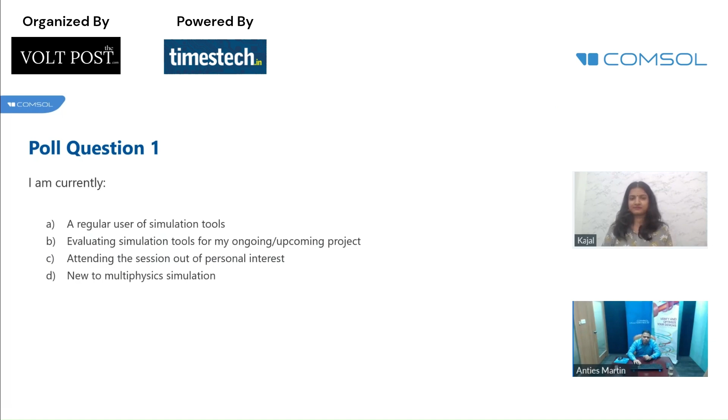So now I'll move to the core part of today's session, starting with the word: what is multiphysics? We'll repeat this word in the coming slides too, and I believe for many people it's already familiar, but I'd like to clarify what we mean by it.

As the name suggests, in COMSOL Multiphysics we focus on two different things: one is flexibility, another is accuracy. Flexibility means we are solving the numerical equations when it comes to the interfaces.

But since we are evolving day by day, you may need to modify the existing equation. So COMSOL is not a black box; you will be able to modify the existing conventional equations, and you can even write your own equation.

Now, coming to the word accuracy, we believe that if you really want to capture any real life problem, it is always going to be multi-physics in nature. So let me take a simple example. Just imagine you are working with a semiconductor device, or maybe I am going to work with an EM device. So my objective here is to understand the EM characteristics. Obviously, it's a single physics problem, which deals only with the EM.

But we know that majority of the time, due to Joule heating, or in a simple way, electromagnetic heating, there will be some heat generation. And it's really important to understand how much heat is getting generated. So in COMSOL, you can add the heat transfer interfaces to the same model, and you will be able to understand the EM characteristics and the heat generated.

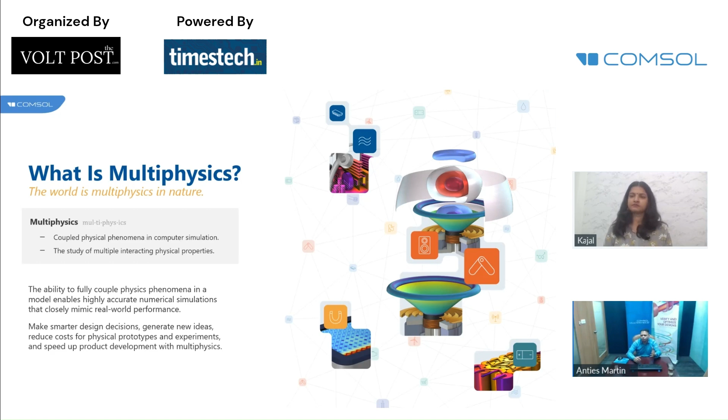Now you will be wondering whether COMSOL is actually the best one for single physics. Obviously, in COMSOL, you can even handle single physics. It could be EM physics or chemical physics, mechanical like CFD and heat transfer, or even structural and acoustics. On top of that, you can couple the same with any physics like electromagnetic heating, thermal stress, or even thermal expansion. You can go for electrochemical heating, and you will be able to address all of your problems by using a single GUI. I will explain what we mean by single GUI in the coming slide.

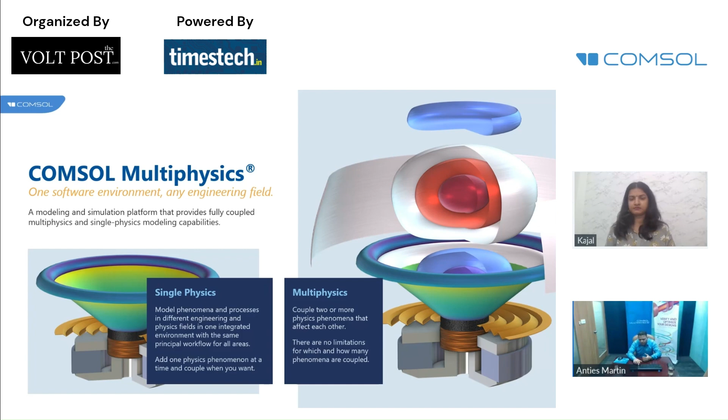Till now, we have just introduced the COMSOL software. Now, many of you will be wondering whether people are using it, or if there are any user stories or success stories. Definitely yes. So I have collected a couple of user stories just to give an idea how people have been using COMSOL software across the industry and in academic research and development. The first user story is related to electromagnetic heating.

We know that power electronics appears in many everyday products, including smartphones, electronic car parts, and household objects. And it's really important to understand how these devices are performing, whether heat is getting generated or it's going to affect the system. On top of that, in harsh environments, with temperatures of maybe about 225 degrees or less than 0 degrees, it's really important to understand whether these electronic devices are performing at the same level.

Because of this challenge, the company wanted to create an electronic package to survive in this kind of harsh environment. So they approached COMSOL, and with the help of COMSOL, they were able to couple low frequency physics and heat transfer, using LiveLink for SolidWorks. With that, they were able to optimize the device geometry and layer thickness, and minimize the inductance and the thermal resistance.

The major challenge they were facing was to couple these physics simultaneously. At the end of the day, if you are not able to solve all these equations in different physics simultaneously, you may not be able to replicate the real life problem as it is. But with COMSOL, using low frequency electromagnetics and heat transfer along with LiveLink for SolidWorks, they were able to optimize and create a package that survives harsh conditions and extreme temperatures of about 225 to 250 degrees Celsius.

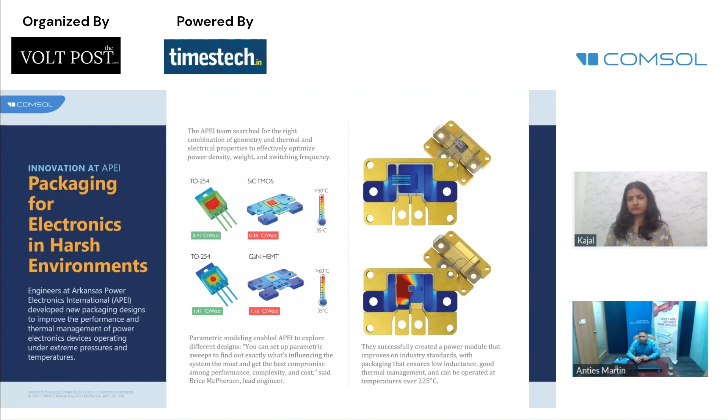Now, if you look at the second success story, which is actually from Bosch, I believe that the word itself is self-explanatory. We believe that Bosch is one of the well-known industries in the market right now, especially from the automotive point of view. So their major challenge was to create the DC link capacitors. The major problem they were facing was because of the hotspot, and these are very sensitive, and it is creating too much heat.

So the major challenge they were facing is, again, the low frequency physics coupled with heat transfer, and they have coupled the LiveLink for MATLAB as well. So they approached COMSOL. With the help of COMSOL, they were able to couple all these physics together, and they were able to optimize the design, and the optimized inverters have a 6% greater range and even a 200% jump in the power density.

So these are some of the user stories which are available in COMSOL and on the website as well. If I try to explain in detail, definitely it will take more time, so I'm not going to spend time over there. But if you are really interested, we can share this information with you so that you can explore more. Till now, we have discussed the user stories as well.

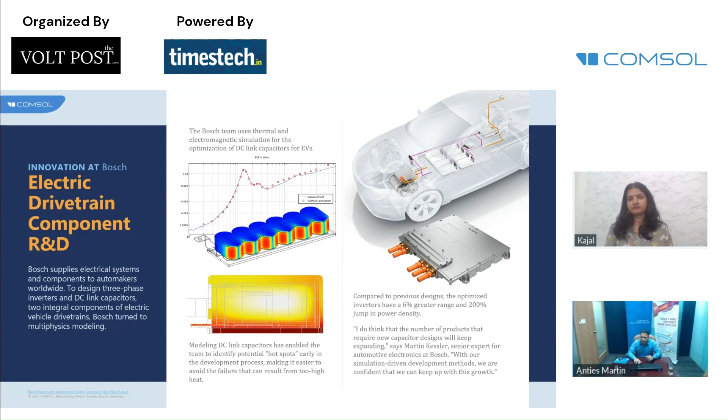Now, many of you will be thinking, why COMSOL? What about the other software? Now, let us try to understand what COMSOL can do when it comes to thermal management. So if you look at thermal management, the heat could be due to various reasons. It could be due to electromagnetic heating. It could be due to electrochemical heating. It could be due to radiation or some other sources. So it's really important to understand how heat is getting generated and how much fluid is required to carry away the heat from the system.

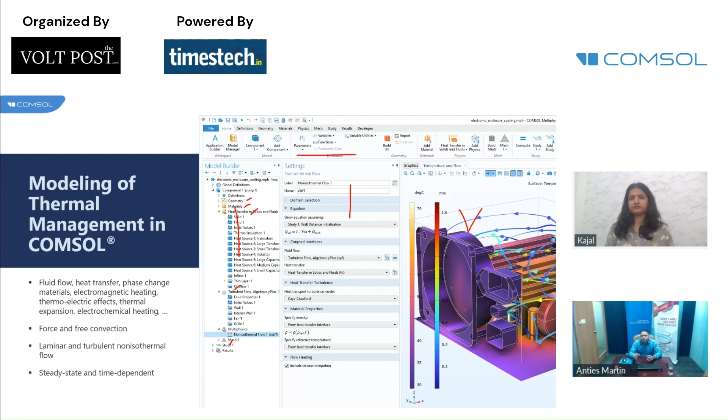So in COMSOL, by using a single GUI, you will be able to couple all these physics. When it comes to heat transfer, you can go for conjugate heat transfer, you can go for free and forced convection, and on top of that, all the turbulence models are available in COMSOL. Also, you can go for stationary and even transient studies. And while using COMSOL, these are the benefits you are going to get. As the name suggests, it's a multiphysics tool, which will help you to couple all these major physics. On top of that, it will give you complete flexibility to modify the equations and the boundary conditions.

And we are using a finite element approach. Obviously, the accuracy will be on the higher side, and you will be able to do certain parametric optimization to cut down your simulation time, and you will be able to optimize your devices. So these are some of the advantages of going with COMSOL software. And on top of that, you can do n number of things. You can capture the real-life scenario as it is.

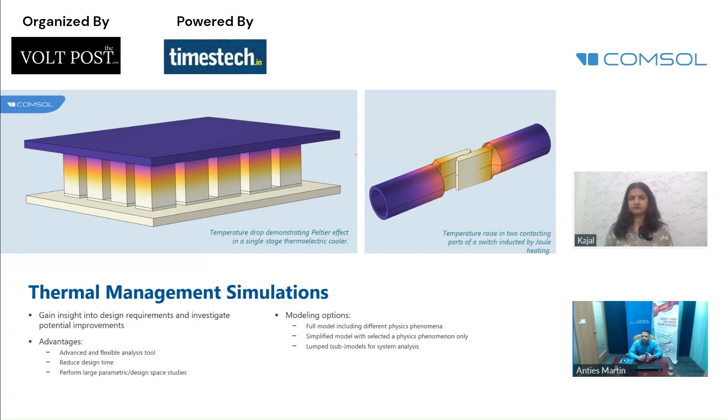So when it comes to thermal management, where is the heat source actually coming from, and how can you do that in COMSOL? You can do that in 3 different ways. The first way is user defined. Suppose you know how much heat is getting generated because of electromagnetic heating or electrochemical heating; then you can use certain empirical formulas, and you can use the same thing by a user defined approach. So you can give that explicitly by using the heat source option.

Now, the second approach is from other physics. Other physics in the sense that, suppose you are solving for EM physics and you are able to know the heat generation, you can use the same thing in the heat transfer physics. Obviously, this won't be a bidirectional one.

But in real life, what is happening? When you operate any electronic device or maybe a battery, the battery will be working and the heat will be generated simultaneously. You cannot run the battery for some period of time and then use the heat source to repeat that in the heat transfer physics. Obviously, you can do that by compromising the accuracy. But in COMSOL, you can do the multiphysics coupling for all the electromagnetic and even the electrochemical heating, which will help you to understand how the heat is getting generated and how the corresponding heat is going to affect the performance of the system, a kind of circular dependency.

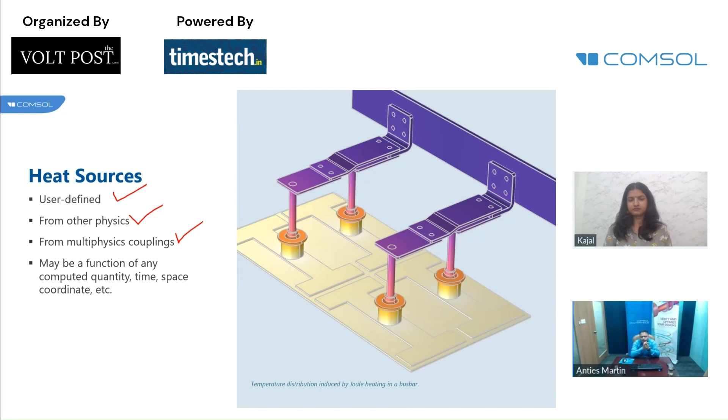Let us try to understand which are the inbuilt predefined multiphysics couplings which will help you to understand the heat generation and corresponding performance. I will start with microwave heating. The word itself is self-explanatory, which deals with high frequency, and a classic example is a potato in a microwave oven. Now you can go for Joule heating, which obviously comes to mind when you talk about electromagnetic heating. And again, an example here is a bus bar.

The similar thing is applicable for inductive heating as well. So here you can see a steel billet inductive heating. Similarly, you can go for all kinds of thermoelectric effects, and we have conjugate heat transfer to account for the fluid flow and heat transfer. We have thermal expansion. Suppose you are not able to do the thermal management properly; even after free convection or forced convection, sometimes it will still go beyond the acceptable temperature range. Then the next thing is structural damage, which is thermal expansion or even thermal stress. To account for that, you can use thermal stress in the multiphysics coupling, which is a coupling between heat transfer and structural mechanics.

You can go for porous media. Nowadays, every electronic device will have porous material to absorb moisture, sound and even vibration. On top of that, there are several applications from the porous media point of view, so in COMSOL we have inbuilt couplings and interfaces for porous media as well. And we have heat and moisture transport, which is self-explanatory. Because of the heat generation, condensation will be there, which may cause further damage to the system. So it's really important to understand the moisture transport as well. So these are some of the predefined couplings available in COMSOL. On top of that, we have n number of predefined couplings, and you can even do it manually as well.

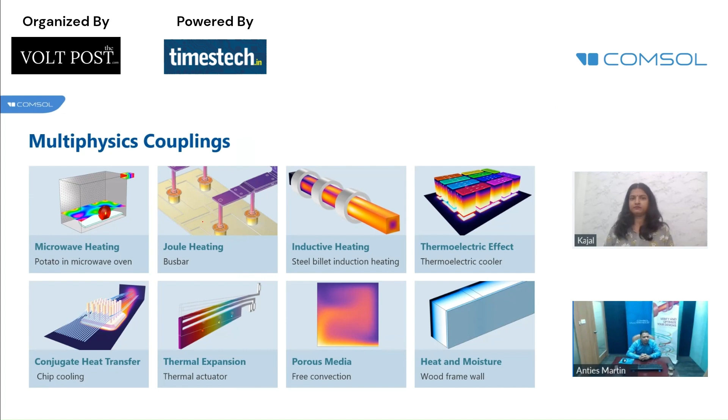With this, I would like to know what kind of application or what kind of heat source you are going to consider. So my second poll question is: I'm interested in modeling electromagnetic heating, which could be Joule heating, microwave or induction heating; electrochemical heating; thermostructural effects; or something beyond that, which you can specify. I will keep this poll question for the next 20 to 30 seconds. I request everyone to answer this poll question so that I will be able to concentrate more on those kinds of things in the coming slides.

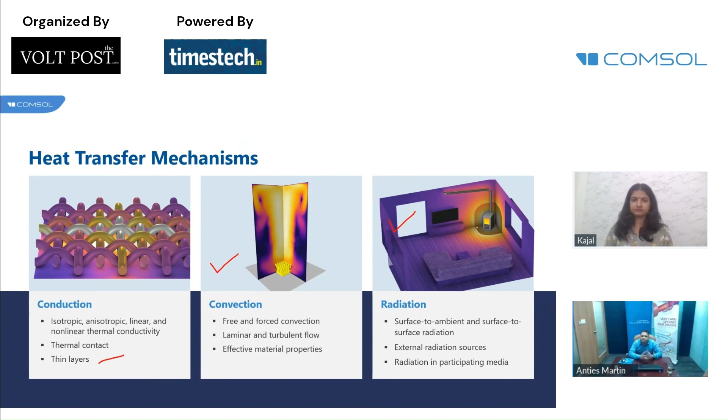Let us try to understand how you can enable the first feature, which is thermal contact. So as I mentioned, the same GUI is used here; obviously the graphics part is cut here. And you can see the equation. I'm not going to explain the equations in detail, but you can see a special boundary condition, thermal contact, and the thermal contact will be implemented for that particular contact.

So now here you don't need to explicitly model that contact. Obviously you can do that and you will be able to do that. But the problem here is once you have these kinds of contacts, the mesh density will increase and even the numerical complexity will also increase. To tackle that, to avoid that, you can use certain boundary conditions like this.

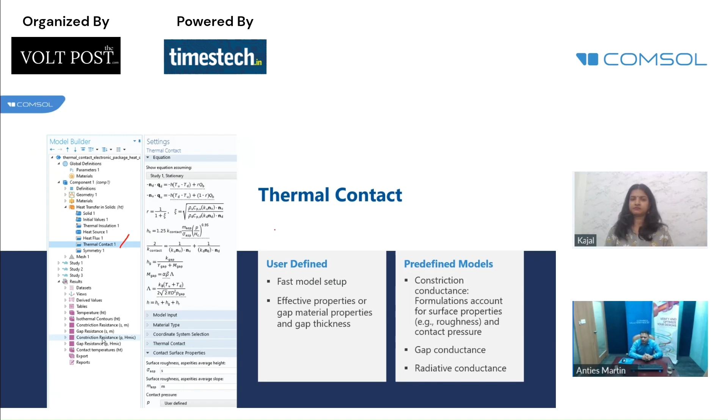Similarly, if you look at the high aspect ratio geometry, this is actually a classic example, and I'm not talking about the aspect ratio of this particular geometry. Here we have a thin film where the current is flowing through this film and it is coming through here. So this is going to be the terminal and this is going to be the ground. Our objective here is to understand, because of Joule heating or electromagnetic heating, how the temperature is getting distributed here.

Again, by using this kind of approximation, thermally thin approximation or thermally thick approximation, you will be able to do that. And nowadays, there is a trend to use composite materials for many electronic devices, especially for the casing, to reduce the weight of the entire setup. There also, you can use the same principle and you can go for single layer materials, multi-layer materials, and even layered material stacks.

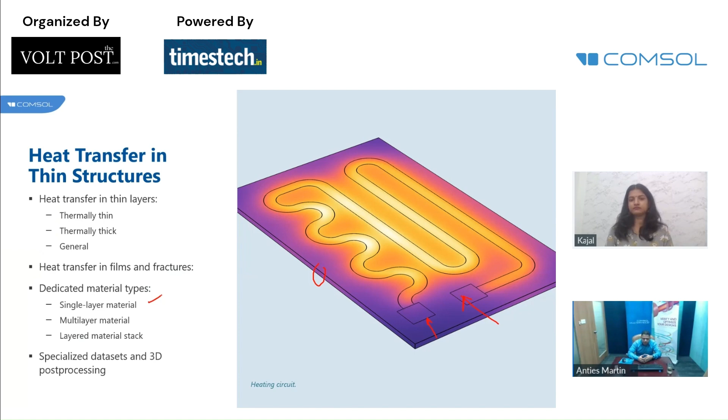So these are some of the capabilities from the heat transfer point of view, specifically from the conduction point of view. Till now, we have discussed where the heat is getting generated and how it is going through the surface. Now, how can you remove it from the surface? Let us try to understand the convection part, or heat transfer in fluids. Similar to conduction, we have a number of options for heat transfer in fluids as well. We have boundary conditions like an inflow condition and an outflow condition. And one of the major options is open boundary.

Suppose you are modeling some phenomena inside a room. Inside the room there will be electronic devices ejecting heat, but there will be a window, and sometimes the fluid or heat transfer will happen from outside to inside, or sometimes from inside to outside. If you use open boundary, depending upon the physical phenomena, COMSOL will automatically treat that boundary as an inlet or outlet, which means mass flux is free to come in or go out. Similarly, we have boundary conditions like fan and screen, and I will explain those during the demonstration.

Fan boundary condition means, suppose you look at a CPU, we know that inside there will be an exhaust fan. Modeling that in a numerical environment will be highly tedious, because modeling the fan geometry itself is numerically very complicated. But with the fan boundary condition, fan manufacturers give you the pressure data. If you feed that pressure data into the boundary condition, without modeling the fan explicitly, you will be able to replicate it without compromising accuracy. Again, the same GUI, same model builder, and same workflow are used in this case also.

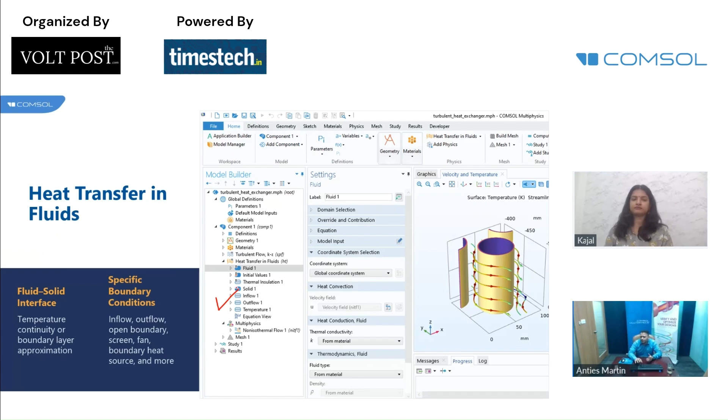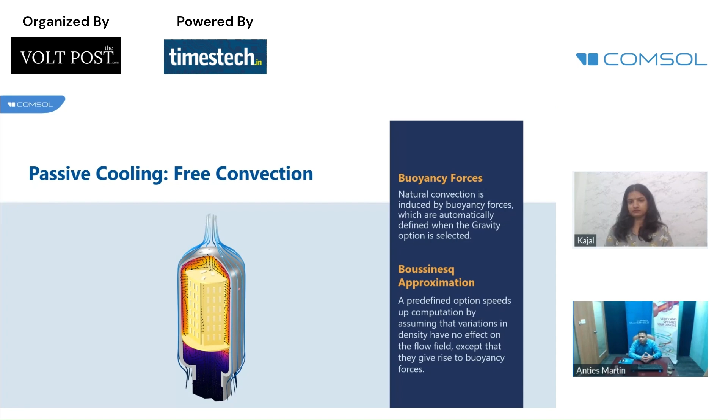If you are going to use this explicitly in any numerical environment, definitely this will increase the simulation time and the complexity will also increase. But in COMSOL, by using a single GUI with these specific boundary conditions, you will be able to cut down the simulation time drastically without compromising the accuracy.

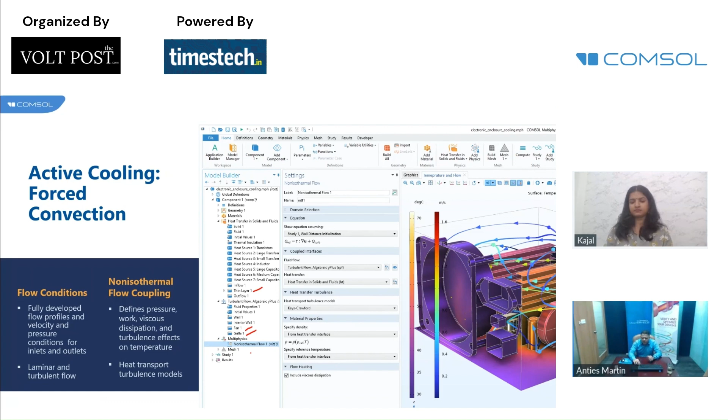Obviously, this session won't be complete without considering the radiation part. And if the temperature is going beyond 600, which is always a hazardous kind of temperature for any electronic devices, you can definitely account for the radiation effects as well, and as I mentioned, you can go for all kinds of radiation.

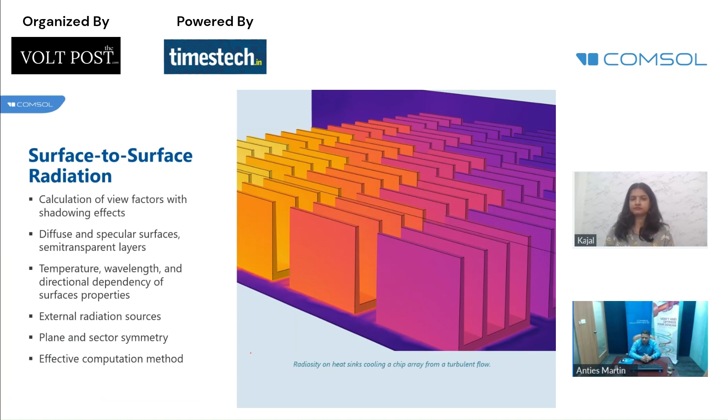When it comes to the analysis type, in COMSOL you can go for stationary study, transient study, and even frequency domain study, with multiple subcategory options. From the fluid dynamics or heat transfer point of view, we have stationary and transient study. There are so many options for rotating machinery and several other options too, depending upon the requirements and demand of the problem. You can use any of these approaches.

When it comes to solver settings, you don't need to worry about anything, because automatically COMSOL will take care of the best possible solver settings for the physics, and we don't need to look into that part as well.

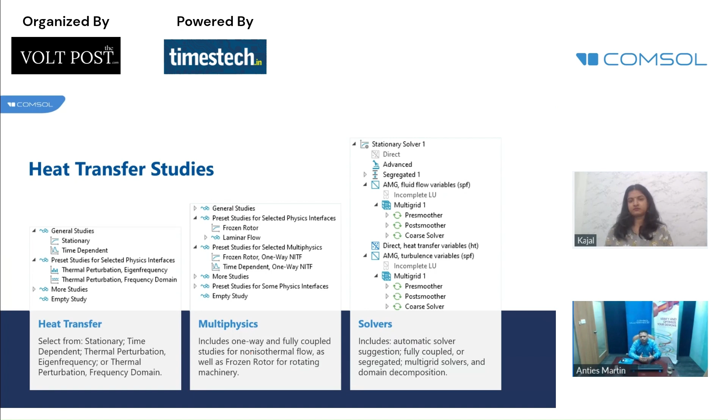Till now, we have discussed thermal management, especially from the higher temperature point of view, assuming the temperature is going up beyond the permissible limit. What if your temperature is going below the permissible temperature, just like a winter country application, maybe for a battery vehicle where the temperature is actually very low?

To trigger the electrochemical application, it's mandatory to have a limited or permissible temperature range, similar to a thermostat, or an iron box, where you need to keep your temperature within a certain limit, or maybe for a water heater. So in COMSOL, we have certain interfaces like the event interface, which will take care of this.

This is actually an example using the event interface. Our objective here is to keep the device within a temperature of 45 to 55. The moment it goes below 45, the heater will be on and it will go up to 55. The moment it goes beyond 55, it will cut off, similar to a thermostat.

For all this kind of application, you can make use of the event interfaces. These are not like physics-based interfaces; you can use the same thing with any physics. It could be a single physics alone, or it could be multi-physics as well.

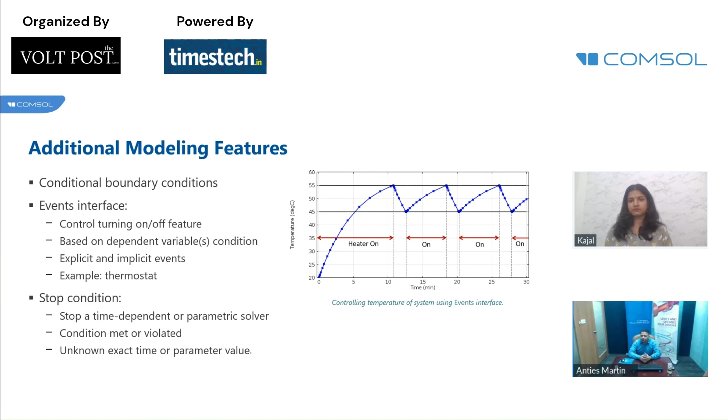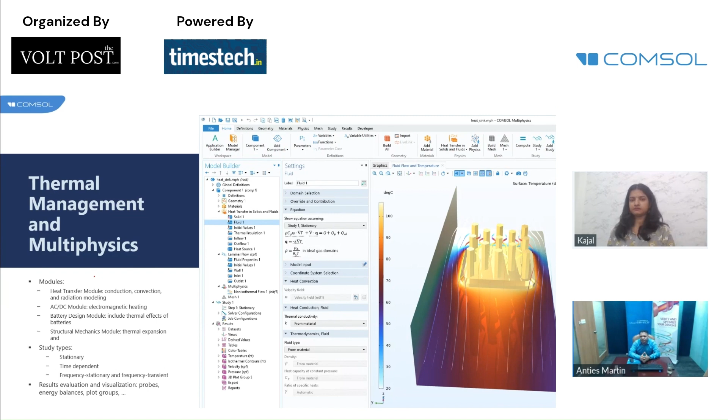As I mentioned, the module requirements are: the heat transfer module will take care of conduction, convection, and even radiation, while the AC/DC module will take care of electromagnetic heating. It could be joule heating, induction heating, or even microwave heating. On top of that, if you want to account for electrochemical heating, you can go for the battery design module.

And if your temperature, even after doing all these kinds of efforts, is still going beyond the permissible limit, then structural physics is required for the thermal expansion or thermal stress. As I mentioned, these are the studies: stationary and time-dependent analysis.

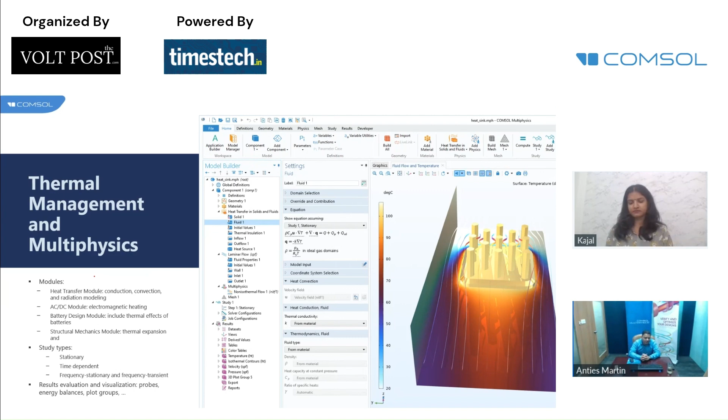So, non-isothermal flow multiphysics coupling is what we use for conjugate heat transfer, where you have conduction, convection, and fluid flow. Here we couple these together in a circular dependency way, where the material properties will vary with respect to temperature.

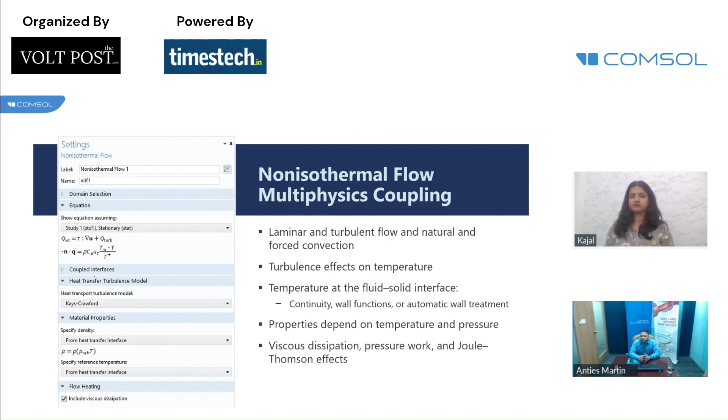A similar thing is applicable for electromagnetic losses. As I mentioned, the same GUI will be used. This is a classic case of electromagnetic heating. You can see the same GUI is used here, with the same model builder, settings window, graphics window, and ribbon window.

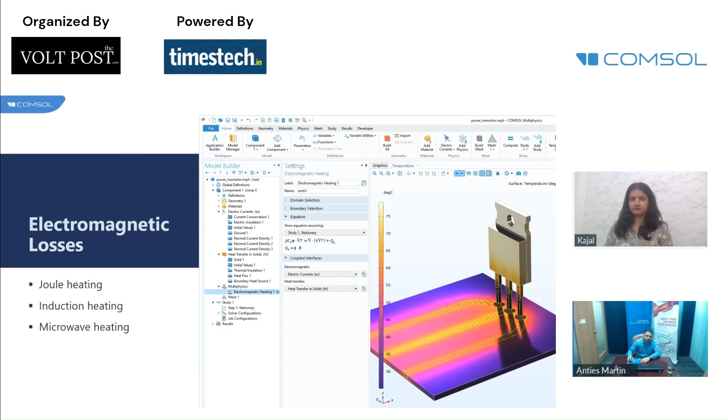So by using the same GUI, you will be able to model this kind of problem. Now, if you look at the thermoelectric effects, especially for refrigeration or CPU coolers from the Peltier point of view, or thermoelectric generators, thermocouples for the Seebeck effect, and the Thomson effect, especially for refrigeration and HVAC applications—these are actually happening in the same GUI.

So you can use the thermoelectric effect coupling here. In the GUI, you can see the thermoelectric effect. You can switch from one effect to another by simply changing the options which are available, and these are inbuilt in COMSOL.

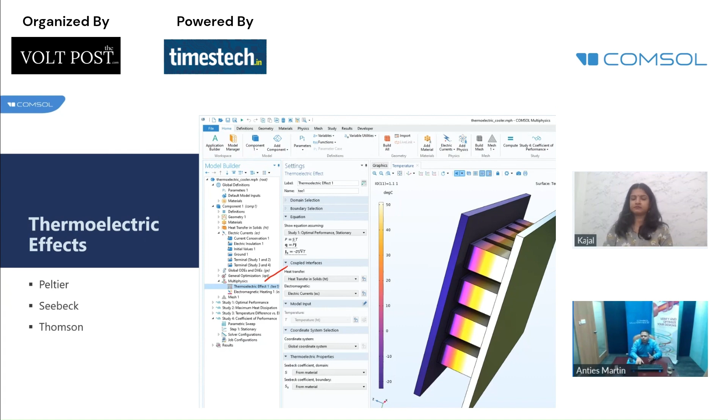This is again going to happen in a single GUI. Now, what if you really want to transfer heat from one place to another? Obviously, heat pipes. Heat pipes are highly efficient thermal management devices used to transfer heat from one location to another. And even you can go for porous material, phase change applications.

So you will be able to couple fluid flow, heat transfer, and even porous media—both free and porous media. And you can go for multi-phase flow as well, meaning two different fluids, like water and air, or maybe some other fluid. All these applications can be easily captured by COMSOL, using the same GUI.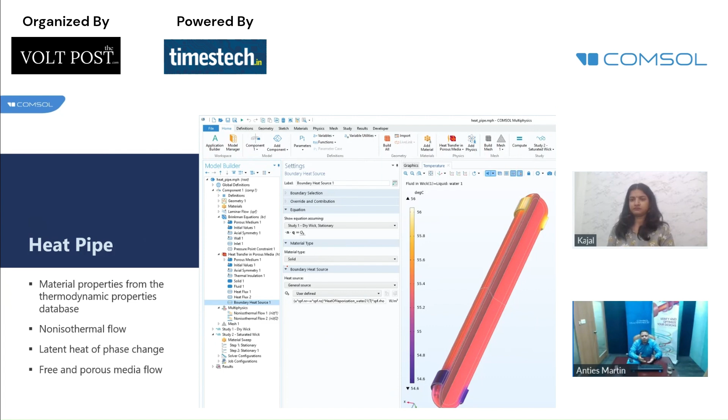Now, if you look at batteries, obviously the thermal management session won't be complete without considering the thermal management of batteries. As I mentioned, for many of us the word thermal management became very popular because of the battery revolution. Through social media and other news, we get this information—battery got exploded, mobile phone got exploded. So it's really important to understand how you can do that in COMSOL.

And as the name suggests, COMSOL is not a black box. You will be able to see the background equations here. You will be able to understand what exactly is happening there.

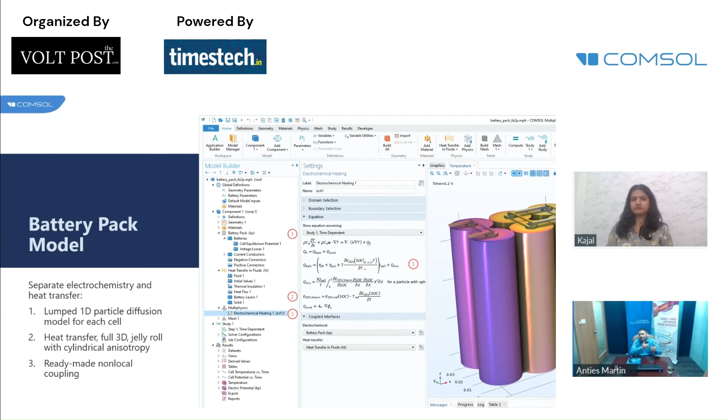You can go for certain fins to carry away the heat from the system, like a heat sink. You can go for thermoelectric coolers and even heat pipes. These kinds of devices are already available in COMSOL, but you can definitely model that from a customized point of view as well.

Till now, we have discussed the heat transfer part, heat generation part, and how you can do thermal management. But there will be a worst case scenario. Even after doing all these kinds of things, you may end up with certain points or phenomena where the temperature is going beyond a particular limit. Then what will happen? It's always a question.

Thermal management part is clear—we can do the thermal management, we can find the fluid required to carry away the heat from the system, we can do n number of things to keep the temperature within the limit. Suppose if it is going to move above the limit, then comes the importance of thermal stress.

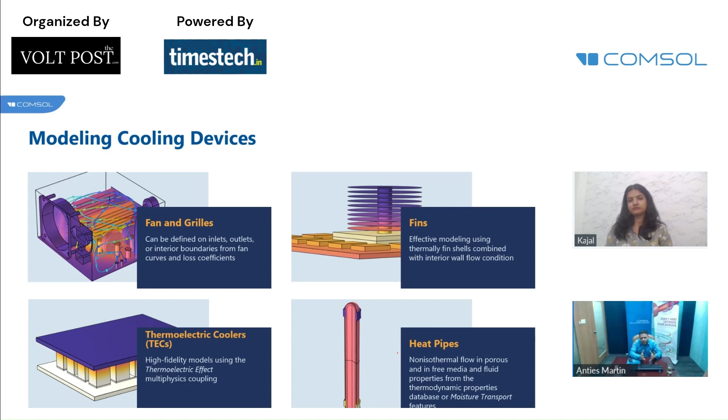Majority of the device will undergo thermal expansion or even thermal stress because of the temperatures. The temperature will increase, which means expansion will happen, which will damage the entire system. So you must have seen certain bulgings and other things in electronic devices—it could be due to thermal stress.

You can even use certain scale-up options to see how this is actually happening visually. These are some of the examples available in COMSOL and its capabilities. I should repeat that word - some of the capabilities available. On top of that, n number of things are available, because COMSOL is actually a general purpose tool, but depending upon the application, you can use it for many applications.

So we have discussed about the unified workflow or single GUI system, and I would like to show a simple demo also. But most probably I will not be able to show all the physics, so I have collected a couple of slides for that.

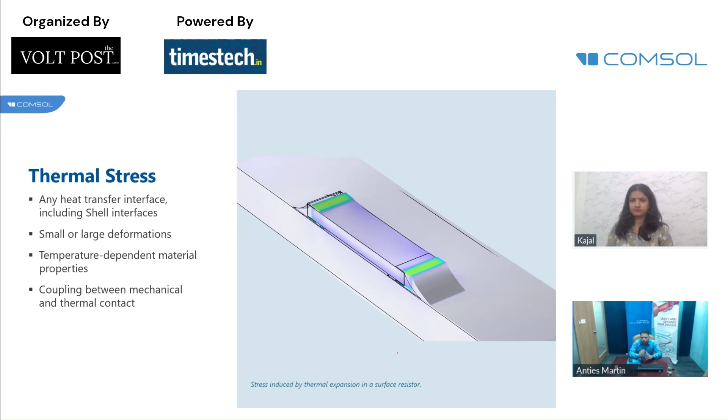Now you can see the same GUI, same interface, and we are just changing the physics and solving our problem. Now what if I introduce battery, or remove the fluid dynamics and add battery? Again we are using the same GUI. There is no difference. So if you look from the user point of view, this will be very useful, and this will make the life of the engineers very easy, irrespective of the physics. It could be single physics or multi-physics. At the end of the day, you are going to do the same thing in a single GUI system.

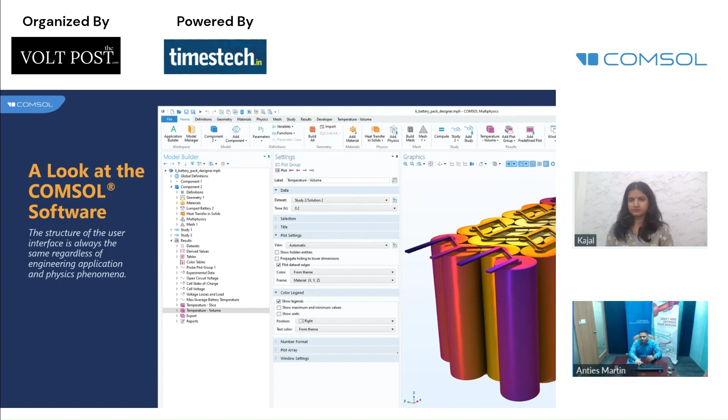So let me go back to the first slide, the pressure acoustics slide, or I would say the acoustics physics, fluid dynamics physics, and even the battery physics. In this way, you will be able to understand how the physics is actually very relevant and how this physics can be used to tackle problems in COMSOL.

With this, I will go to my demonstration. Definitely, I will take one simple example. I don't think I will get time to do it from the scratch level, but still I will open the interface there.

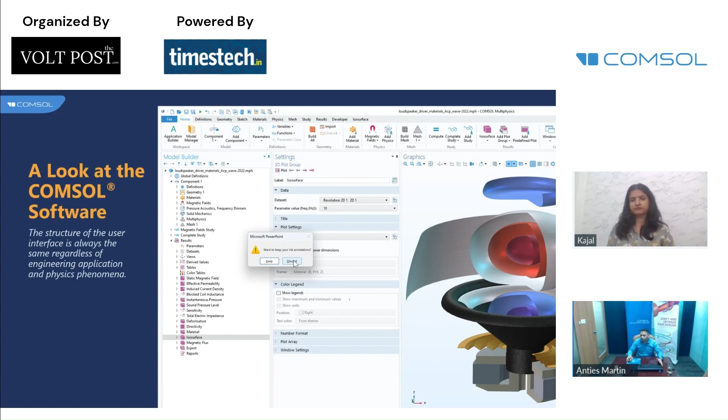So before setting up the problem, you need to have a well-defined problem in your hand. Just imagine I'm going to model the CPU of our computer, where you will be having conduction, convection, fluid flow, and a fan will be there, a grill will be there, and maybe certain high aspect ratio geometry will be there. Let us try to model that problem.

So the moment I click on the COMSOL icon, I will get a window like this - Model Wizard and Blank Model. Blank Model is recommended for experienced users. Definitely I can use it because I'm using COMSOL for the last good number of years. But people very new to COMSOL, they can start with the Model Wizard.

Now COMSOL will ask you which kind of space dimension. We have 3D, even 0D, which is actually for kind of a perfectly mixed system. I will start with 3D. Now forget about this 'recently used' - this is actually for me because I was using the COMSOL software.

You will get an option from AC/DC to mathematics, and if you are not sure about the interfaces, you can read this message from COMSOL to confirm that you are moving in the right direction. Looking at my problem statement, at the moment I'm not interested in modeling the electromagnetic heating. I'm going to assume the heat source, and calculate the heat source empirically.

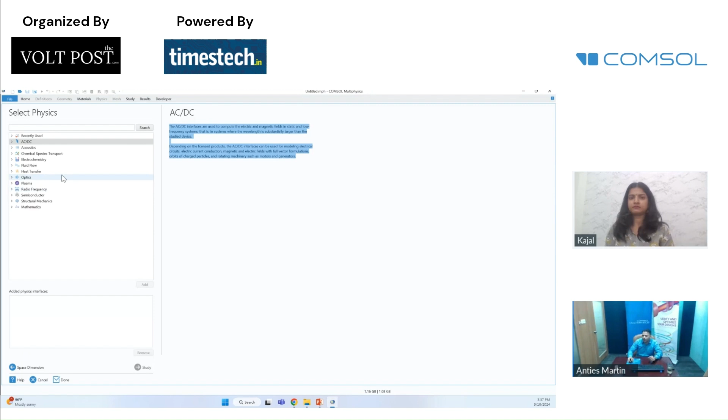So what I will do is go to heat transfer, and we have a predefined multiphysics coupling for conjugate heat transfer. I will expand conjugate heat transfer, and just imagine my problem is laminar in nature. I can read this message from COMSOL to confirm that I'm moving in the right direction. Now I'll click on the Add button.

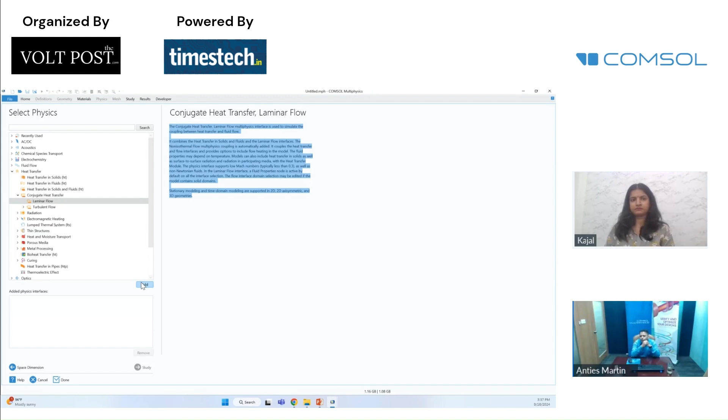Here comes the beauty of COMSOL software. The moment you click on the Add button, you get the two possible interfaces, which is heat transfer in solids and fluids to account for conduction and convection, and we have laminar flow and the multiphysics coupling.

Now I'll go to study. I will select stationary study - definitely you can go for transient. You have a description from COMSOL to make sure that you are moving in the right direction. I will click on the Done button.

Hope you are able to recall the interfaces which we discussed when I was going through the slides. So on the left side again, model builder, settings window to communicate to COMSOL software. We have graphics window where you will be able to see the geometry, mesh, and the results. Information window will help you understand how the simulation is progressing, and you'll be able to see the log file as well. And we have ribbon window to create the user-friendly atmosphere.

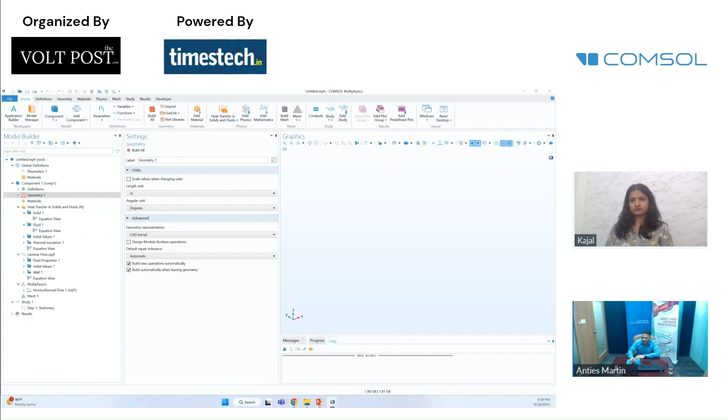Right now, I'm not going to create it from scratch. So I will open the same GUI in the COMSOL window, which I have already solved. The simulation time was in the order of minutes, something in the order of 19 minutes, so I don't want to run it again. So let us start with the definition.

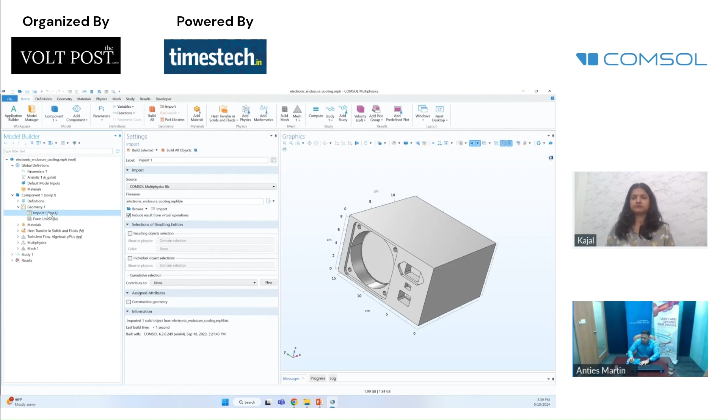Right now, I'm going to assume that I have a well-defined problem in my hand. Now my second step is to create the geometry or import the geometry. So I have imported this geometry, and you can see the import option, and the geometry is actually available. So this is the geometry. For better visualization, I will hide one or two boundaries.

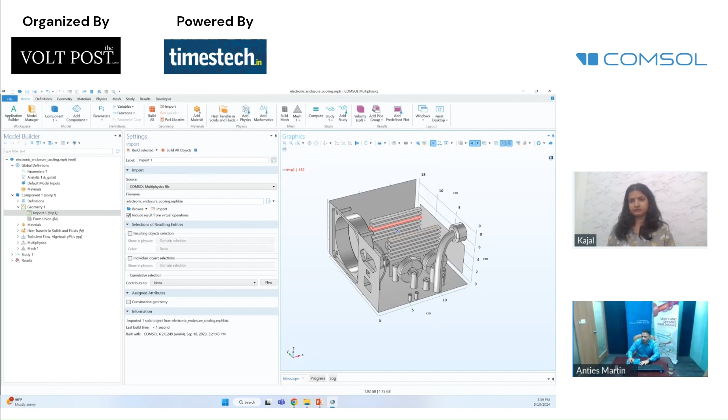Just imagine this is our CPU, and we have a fan here. We have certain devices inside to generate the heat. We have certain fins to carry away the heat, or maybe some high aspect ratio geometries here. So the second part is also done.

Now we need to assign the material. In COMSOL, we have 15,000 plus materials with all the relevant properties, that too as a function of temperature or any other parameter. So you can select these properties, and you can assign these materials to each domain.

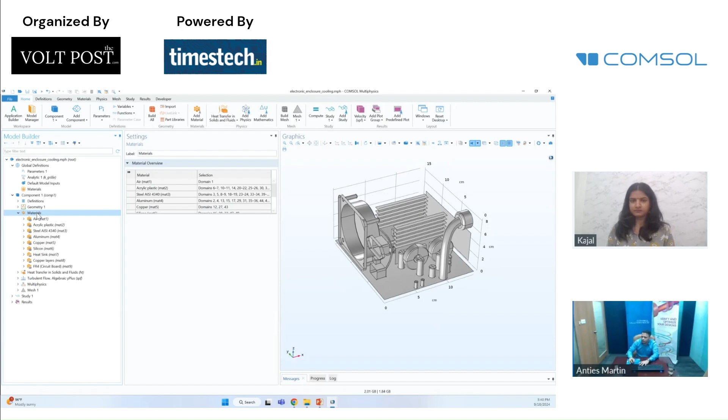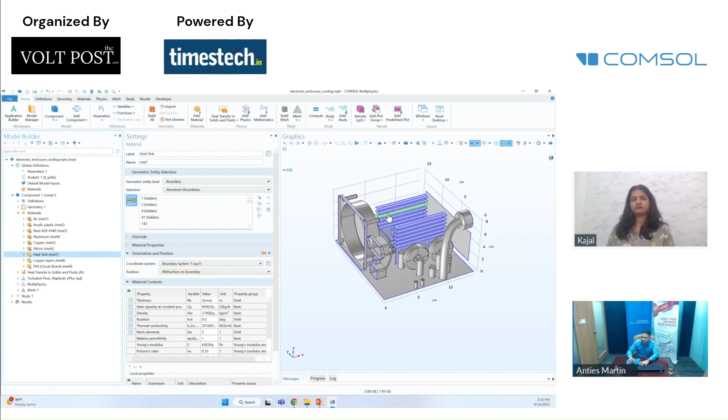So you can see air is assigned for domain 1, which is the enclosure. We have plastic here, we have steel here, aluminum, copper, silicon, heat sink, which is actually our high aspect ratio geometric part, copper layers, and even circuit board. So these are the materials I'm going to consider here, and obviously these materials are selected from the material library. Now you can see how the material is actually a function of temperature.

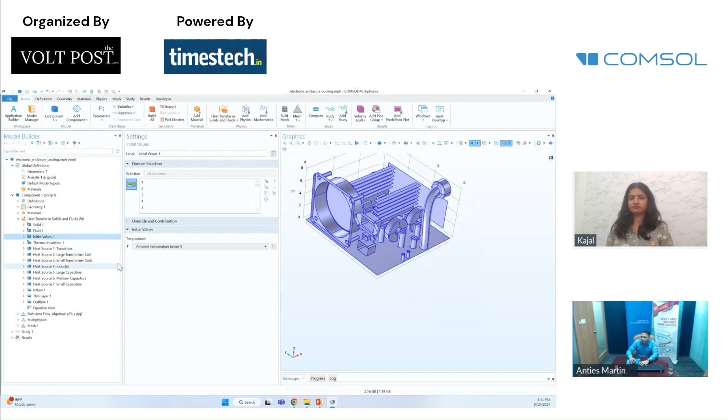Now the first physics is heat transfer in solids and fluids, where we have solid domain, which is a default domain, and we have fluid domain here. Then we are going to solve with the temperature as the initial condition, so I'm going to use the ambient temperature. By default, all the boundaries will be thermally insulated.

And I'm going to give the heat source explicitly. So you can right click at heat transfer, and you can select the heat source. So heat source 1 is actually 25 watt, and the transformer coil 5 watt. Different heat sources are there, so I'm using the same node, and I've selected different domain condition here. So these are the options available; you can give different heat sources.

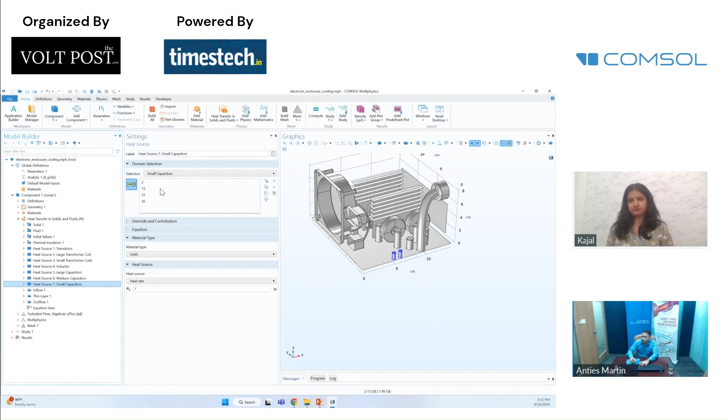Now I'm going to give an inflow condition. This is my inflow condition where the fluid is going to come in. So you can go to right click at heat transfer, flow condition, inflow. Now you can go to outflow.

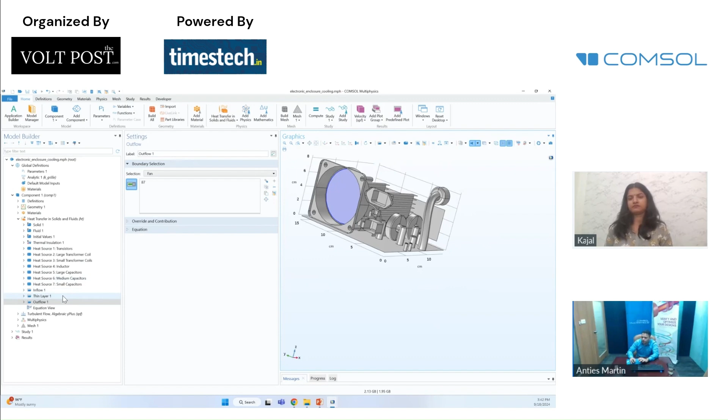At the outflow, you can see the fan boundary condition is selected, assuming that the fluid is going to come out of that. Obviously, the fan boundary condition I will show you. And for the thin layer approximation, we are using thin layer. You can specify whether it is going to be a single layer or multi-layer. All this information can be given here.

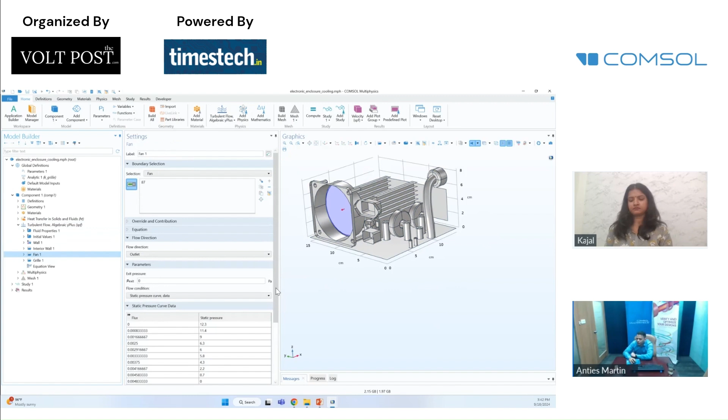Now for the Navier-Stokes continuity equation, or for the flow equation, we have selected one, and we have compressible flow, and we have fan boundary condition. As the name suggests, instead of modeling that explicitly, you can use the fan boundary condition, and you can use the pressure data. Each and every fan manufacturer will be giving you the pressure data. So you can feed that here by using the options here, and automatically COMSOL will act like that particular data without compromising the accuracy.

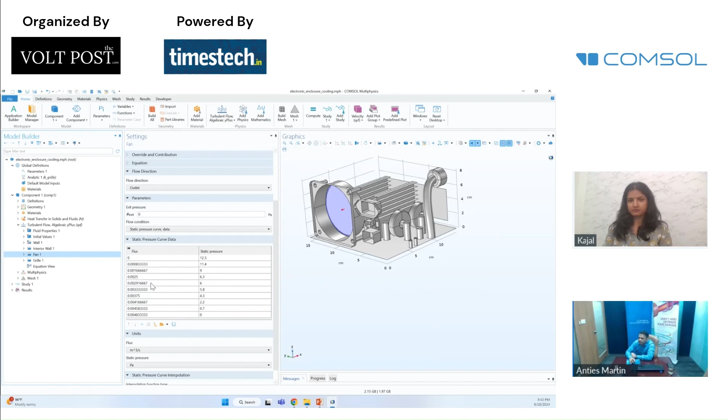Similarly, you can give grille condition. The backside is actually a grille. You can see that in the CPU as well, and you can give the coefficient as well, the loss coefficient. And both are coupled by using the multiphysics coupling, where you will be able to see the coupling, heat transfer and fluid flow. And you can go for the meshing.

which is inbuilt in COMSOL. You don't need to do anything. So we have physics control mesh and even the user control mesh.

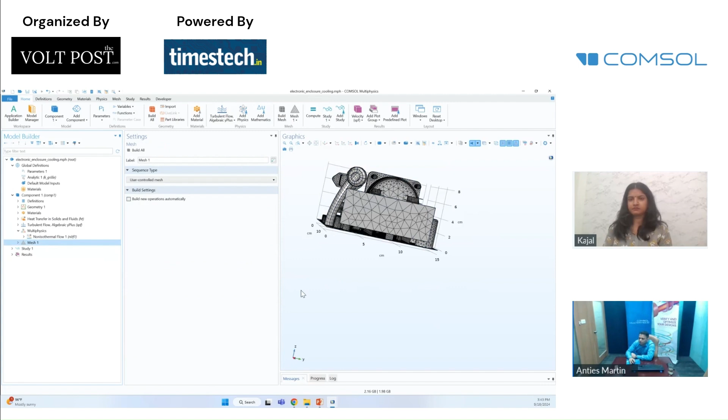Now you can go for the study. So I'm not going to click on the compute button; I will show you the results. Depending upon the dependent variable, you will get temperature. So you can see the temperature distribution. I have created it with the streamlines as well.

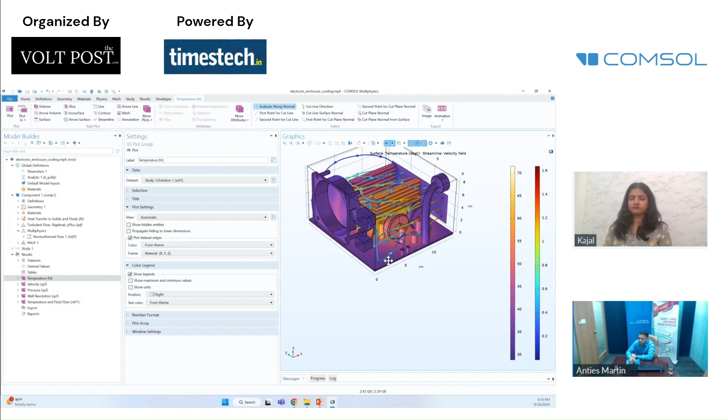You can go for the velocity. You can go for the pressure distribution. You can go for the wall resolution. You can even go with the temperature and fluid flow. So these are the options which are available in COMSOL. These are default. On top of that, whatever can be extracted from this simulation can be extracted by using the replace expression option. Everything will be available here. Depending upon the problem statement and the requirement, you can pull this out.

So we are slightly running out of time, so I'm going back to the PPT.

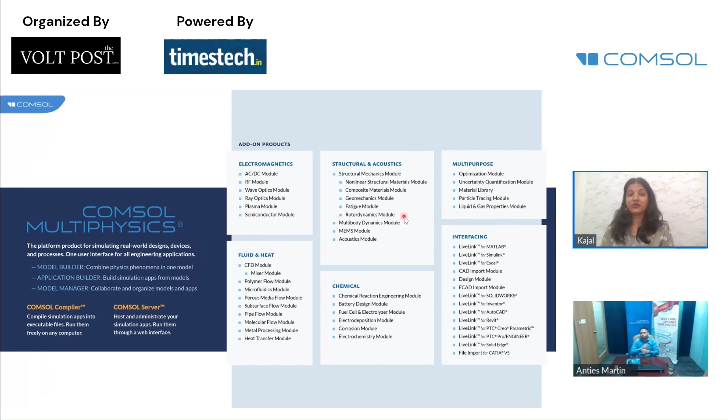So here is one question: how do I verify the energy balance for my thermal model? Dr. Martin, I would like to request you to answer the question. Yes. And honestly speaking, I was expecting this question, because people who are doing numerical work will definitely ask this question.

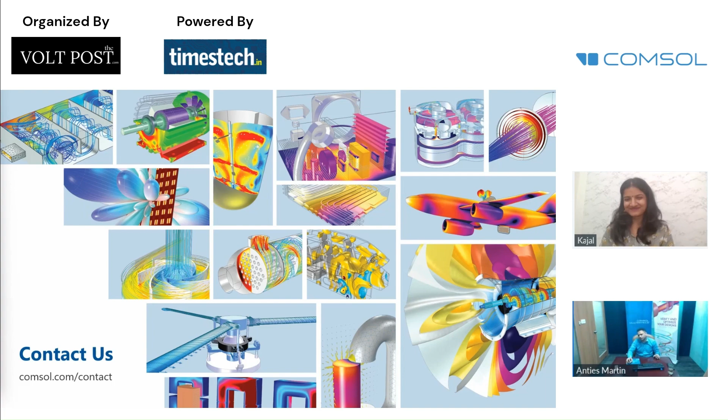So in COMSOL, we have a blog for that. Definitely at the end of the day, you need to do this and you need to verify whether the energy balance is happening or not. So we can definitely share this link with you. It's a blog which is available, it is kind of an open source blog. You can definitely refer to this, where you can calculate or go for the energy balance.

Moving to the next question, what is the difference between the lumped and distributed approach for convective heat transfer? Basically, in lumped, as the name suggests, you are going to assume it's uniformly distributed and there won't be any change with respect to space. At the end of the day, properties are going to be average properties. When you go for such kind of assumptions, definitely there will be some compromise in the accuracy. But if you consider it as an actual system, you are going to replicate the real life scenario as it is. So this is the main difference.

But for certain problems you can assume that the lumped approach is the best approach. I can give you a simple example. Suppose you are going to model the same CPU, and we know that radiation effects are kind of negligible. So now it's your choice whether to consider the radiation or not. Even if you consider the radiation, the accuracy level will not be that affected. So it's up to you, and even up to the problem statement. You can assume whether it's going to be a lumped or distributed approach.

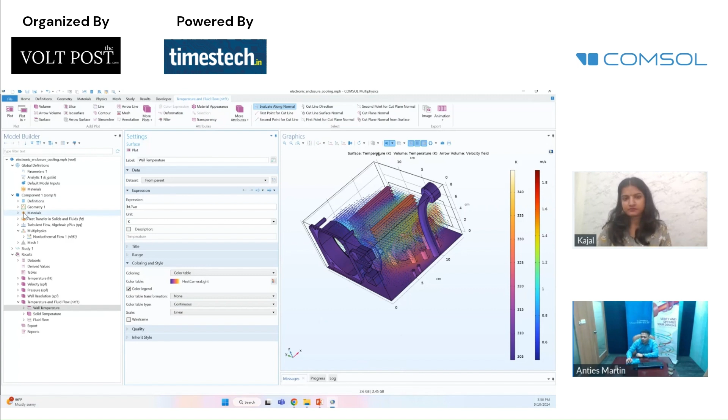Okay. Next question is how do I incorporate temperature dependent material properties in my model? Okay, so let me take this example, and I would like to go to the material. If I click on the air, you can see dynamic viscosity, thermal conductivity, gas constant, and even the heat capacity. All are a function of temperature, obviously not the specific gas constant. So you can see the eta value. Maybe I will go to the material properties and expand this. So you can see the eta.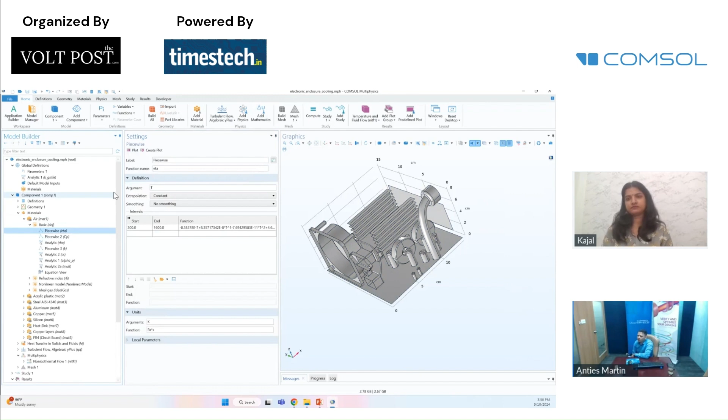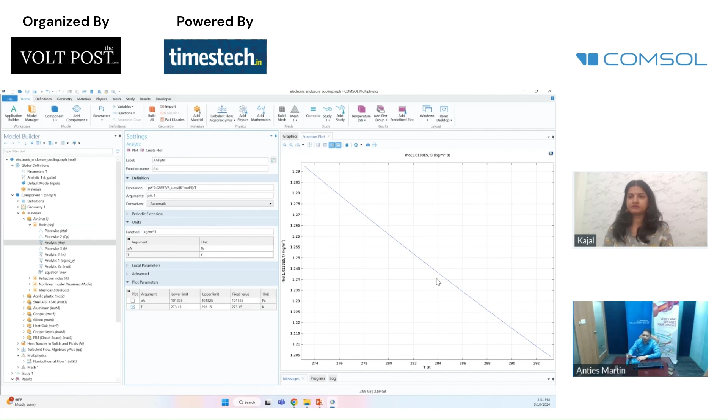So now you can see how the dynamic viscosity is varying with respect to temperature, starting with 200 Kelvin. Similarly, the Cp value is also varying, and even density. These are important from the heat transfer and fluid dynamics point of view. So in this way, COMSOL will be able to account for all the possible materials and their corresponding influence. And you can even write your own material in the same way, using a piecewise function or analytical function to see how the properties are varying with respect to temperature or any relevant parameters.

Maybe it could even be space. Maybe in the x direction it will be varying like this, and in the y direction it will be varying in a different way. So you can add that as well. In this way, you can account for the effective material properties.

Okay, moving ahead to the next question. How do I obtain a heat transfer coefficient for the convective heat flux condition? Okay, so convective heat flux. Generally in the numerical engineering environment, if you are going to give natural convection over the boundary, I prefer 5 watt per meter square Kelvin, which is considered natural convection. On top of that, if you go to heat transfer in solids here, maybe I will add that.

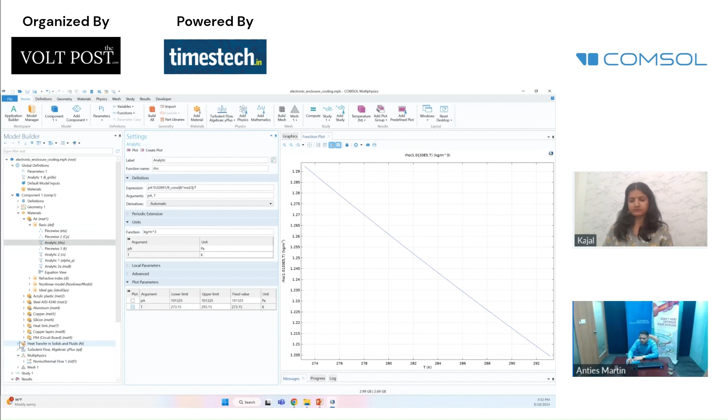Maybe I will select heat flux here. Just imagine the heat flux is going to happen here. Right now it is general inward heat flux, where you are actually going to give the heat to the system. If I change this to convective heat flux, now you can see the equation Q equals hA delta T, and you can give the heat transfer coefficient here.

So suppose if it's natural convection, you can use 5. Obviously, it may not be 5; it depends upon the problem statement, the physical phenomena, maybe location, everything. But in an average way, in the engineering world, we can use 5 watts per meter square Kelvin as the h value.

On top of that, you can change this to convective, change this to external natural convection, and you can specify the L value, how much is actually exposed to the atmosphere. You can change this to internal. You can go for external forced convection and even internal forced convection. So in this way, you will be able to account for the h value, the heat transfer coefficient values, in a simple way.

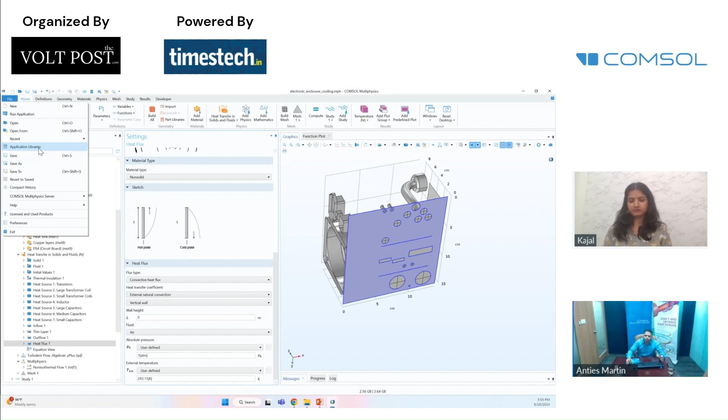So if you go to the file menu in this interface, you can go to application libraries. These are tutorials which are approved and verified. So you can go to the optimization module. Let me go to the optimization module. The screen is slightly away from my side, so slightly difficult. Okay, fine. You can see parameter estimation, shape optimization, topology optimization.

You can select any of these, and we have a classic example of topology optimization of a water heat exchanger. I think it is not listed here. Definitely we can share after the session. It's a topology optimization of a shell and tube heat exchanger. Obviously the vaporization part was not considered, but I think it will be a great starting point for you, where you will be able to see the PDF document and the model file. So after the session, I can definitely share.